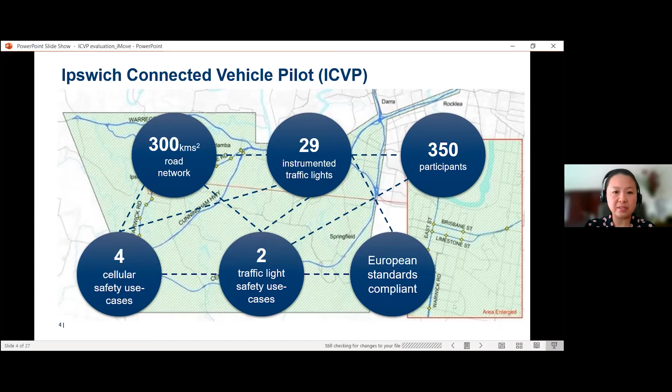And also we have a few traffic light corridors in Ipswich that are controlled by TMR. So we can implement all these use cases along, and also it's easier for us to maintain throughout the pilot study. So as you can see, there were 29 traffic lights that were instrumented with the CITS equipment. And from there, we have 2 traffic light use cases and 4 cellular type. I'll explain that a little bit more later.

And there are 6 safety use cases that we have developed in collaboration with our vendors. And on the left-hand side, we have 2 traffic signal based use cases. These 2, advanced red light warning and turning warning, are to provide participants warning in advance of any conflict, like if we believe that they are traveling too fast approaching a red light, or they are going to have conflict with the pedestrian crossing during the green.

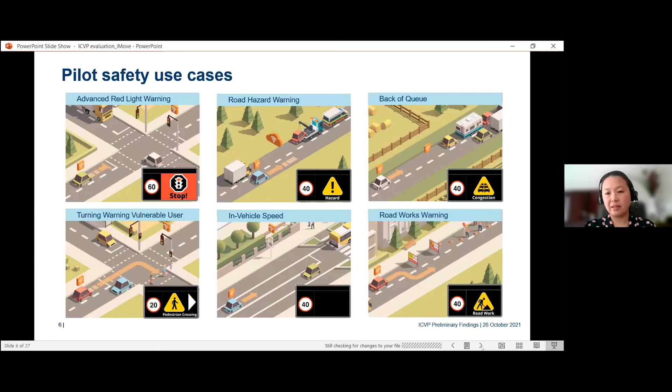So some overall pilot statistics here. So after the 12-month pilot with 350 people, everyone was required to travel about 3 hours per week minimum in the pilot area. So we end up with all these numbers here. So we have about 50,000 red light warnings issued. The yellow column means that they only have a medium, lower level of warning. The red column means it's escalated to a high level warning, which means that they really have to take action, not just a notification that there's a hazard.

So with the traffic signal based use cases, the communication between the roadside unit and the vehicle station is 10 Hertz. So every 1/10 of a second, they have been communicating to make sure that the safety critical information is transmitted to each other. So latency has been a very important aspect for us to look at.

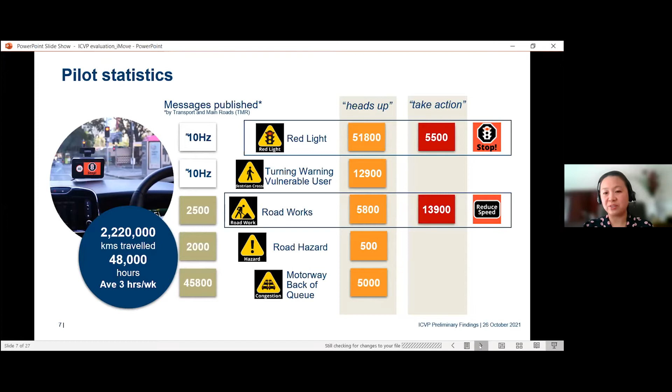And for the cellular type of warnings, we have a much smaller amount, basically because roadwork is not everywhere all the time, so it's just when they occur or when the participants were driving close to them. And yeah, you can see that there's a huge amount of data that we have to look at to provide some safety benefits.

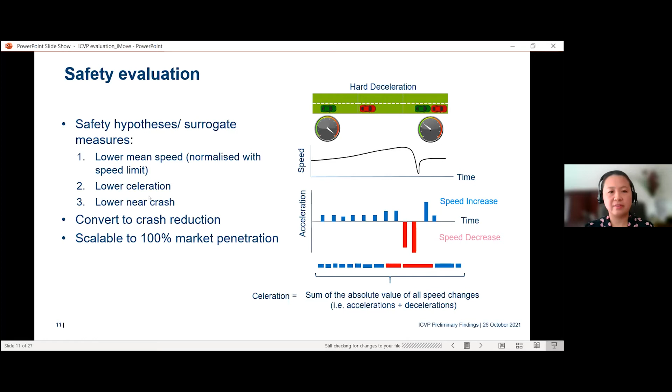Hello, everyone. So once we've done all this pre-processing and trimmed all the scenarios, how do we actually arrive at evaluating the safety of this system? We've done this by selecting 3 hypotheses, and these hypotheses are selected because they're good indicators of the safety of the vehicle. We can actually convert them to a crash reduction and then scale them to 100% market penetration. So the most typical one you would have heard of before is low mean normalized speed. Essentially what we do is we look at participant speed and we divide it by posted speed, i.e. the speed they're meant to be compliant with, and see if this changes when they receive warnings.

Perhaps a little bit more abstract is our second one, low celeration. And celeration, as you can see in that figure on the right, is essentially a summation of the absolute value of all these minute speed changes. So if we have someone that's slowly accelerating up behind a vehicle, we can see that all those blue bars are little bits of acceleration, and then they hard decelerate. So then we see that those red bars indicate deceleration. So essentially what we do is we convert all those accelerations and decelerations into one giant bar, one value, and that is a participant's celeration. And that's good because every participant has celeration, and evidence suggests that a person's celeration is related to their crash likelihood. So a low celeration means they're less likely to be involved in a crash, and vice versa.

And our third hypothesis, which is a little bit easier to understand, is lower near crash. So we expected that people who are receiving these warnings are going to have a lower near crash rate than if they weren't, because of several things, including their increased awareness of scenarios. So we investigate all of these hypotheses. Next slide, please, Mel.

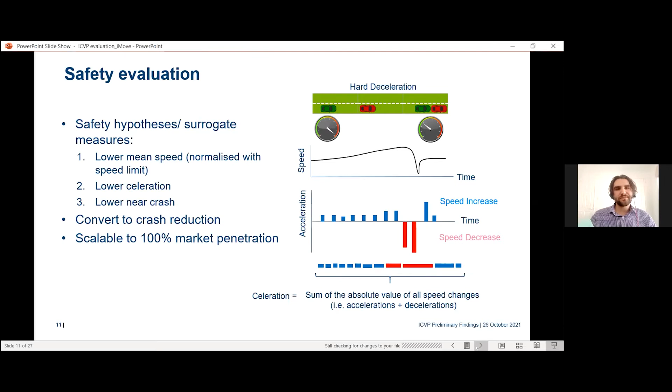Yep. So the way we've analyzed this is best explained by talking about the importance of these warnings. We need to analyze exactly what the impact of this warning is specifically. So there's no point looking at an entire trimmed scenario that Mel showed, because their celeration, their mean normalized speed, and all these other hypotheses are going to get diluted along the entire drive. So what we wanted to do is pinpoint exactly when they were getting these warnings and identify the change occurring because of that.

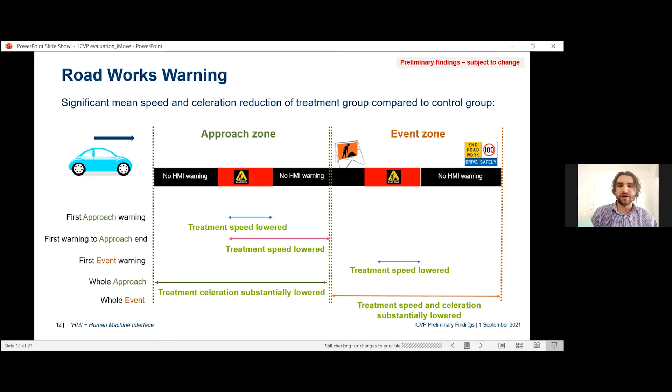So when we look at all these different windows in these different zones, what do we see? Well, we saw that the people who are receiving the warnings in the approach zone have a lower mean normalized speed, and their acceleration is actually substantially lower when we look at that entire approach zone. Even in the event, we see that they have a lower speed along the warning, and throughout that entire event zone, from that 40km/h zone until they leave it, they have a substantially lower speed and acceleration. So when we scale this, it equates to approximately 50% reduction in work-related crashes at the roadworks specifically.

Next slide, please, Mel.

So the back of queue doesn't have an event zone, and it's relating to the congestion. So we warn people that there's congestion ahead, and so it's only as they approach this congestion zone. And so when we look at the entire, so as soon as they enter that kind of approach, they enter a track where they encounter a congestion area, we see that the speed and acceleration is lower for people who are receiving these warnings.

But when we actually look at that warning onwards, so we know they've received the warning and they should be changing their behavior, we see that the speed doesn't have a significant difference between HMI, but speed variation or their acceleration from the warning onwards is lower. So this indicates that they might be receiving the warning and coasting ever so slightly slower, and they're not actually going to abruptly brake once they encounter this congestion.

Next slide, please, Mel.

And probably one of the more difficult use cases to evaluate is the road hazard warning analysis. And so these scenarios are very rare. I think we ended up only being able to analyze about 600, 800 scenarios. And it's very difficult because the sample size is so small and there's a lot of variation in these road hazard warnings. This road hazard warning covers anything from faulty traffic lights to flooding to a vehicle on the side of the road.

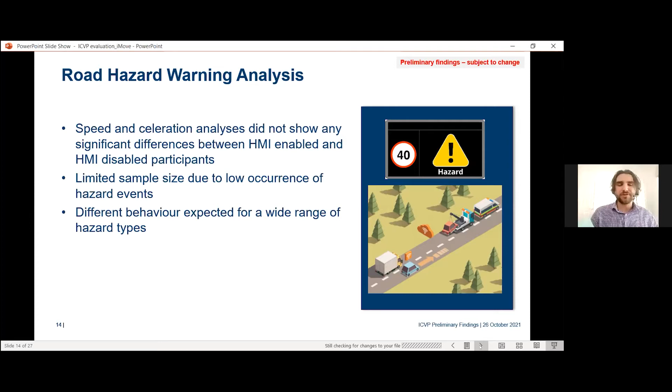Next one, please, Mel.

And one of the big problems with it is because of COVID. And because COVID was in place, a lot of the main intersections were equipped with automatic pedestrian crossing. So someone didn't have to activate the pedestrian crossing for it to go. And the system is not able to recognize that this was an automated pedestrian crossing. So for 6 of the major intersections, we had to remove all the data when these pedestrian crossings were activated.

And from memory, it was from the beginning of the fault until about the 18th of February, where we had to remove this data. Also, participants received some false positive warnings because they had a straight movement. This is specifically for turning movement. So when people are going straight and there's a pedestrian crossing activated that they're meant to turn through, they also received these warnings.

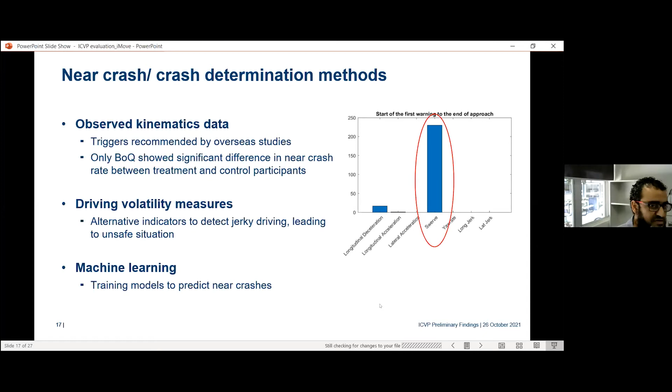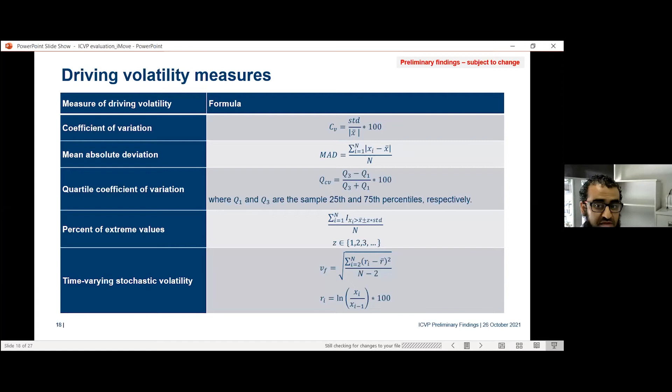And so for volatility measures, we used 5 different volatility measures, which are used to measure the deviation from normal driving. And we used also the historical crashes at the intersection location and identified motorway links to model the frequency of crashes as a function of volatility using the control participants.

And once we did this model, we can actually estimate the expected crashes for the baseline and for the intervention and compare the expected number of crashes. And then we can estimate if we have a significant reduction in crashes because of HMI or not.

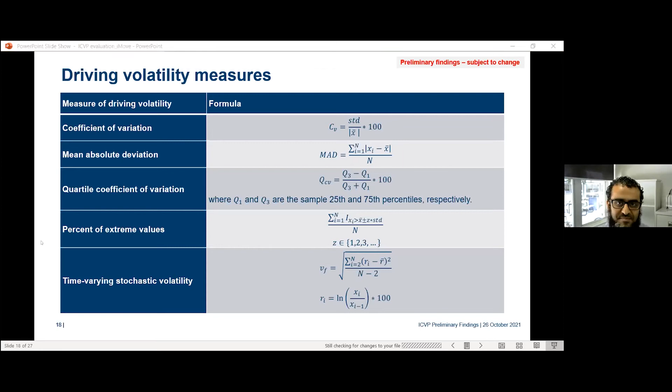So Jack? Yep. I'm just conscious of time, so I'll very quickly go through this so I don't steal any of Mike's glory. So essentially what we do is we look at the 100-car data in the American data set.

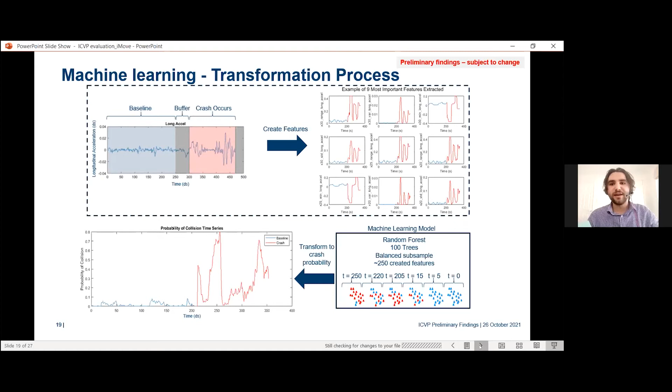So if we want to talk about this a little bit further, I'm happy to take any questions, but I'll give it over to Mike so that he can actually get a chance to talk. Thanks, Jack. So yeah, conscious of time, I'm going to speed through this as fast as I can.

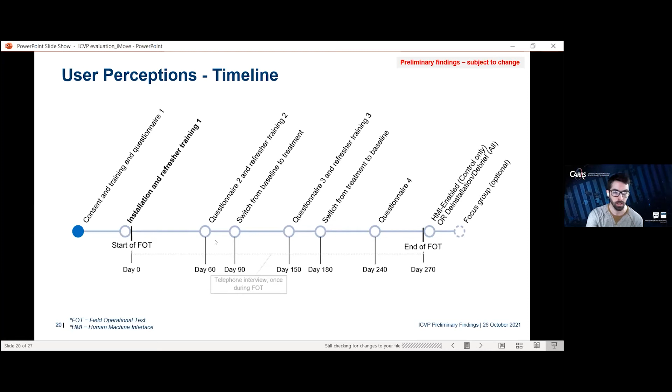Basically, this is the timeline overview of what each participant saw in their 9 months. There were 4 questionnaires. The first questionnaire was completed before they had the equipment installed, and then they saw 3 remaining questionnaires spread out over the 9 months. And then during that time, they could also do interviews and focus groups afterwards when they were done participating.

Okay, so this is just a brief look at our participants. We had 350 to start. The mean age was 46. Our oldest participant was 78 and the youngest was 20. Split down the middle in terms of gender, and most of our participants had open licenses.

We were restricted by the technology being installed in people's vehicles and being an extra display, so we weren't able to recruit new or learner drivers, but we did have 3 P2s in there. The final sample that we had by questionnaire 4 was 326, and that was just the result of normal participants wanting to withdraw and some missing data.

Okay. So these are the measures that we looked at. Acceptance is a pretty standard one. We used the unified model for driver acceptance. We looked at self-reported safety, differences in attention and perception. This is self-reported attention and perception, experiences related to the warnings and the HMI, experiences related to the use cases and general experiences in the pilot.

And then in the most recent round of interviews and the focus groups, we also tried to get at some idea of what they thought future technology should do and what it should look like. Okay. So participants made the ratings on most questions using sliding scales, which you can see here at the top. This is the overview of acceptance in and of itself. So on the left side, they were rating bad versus good, useful versus useless, etc. And then on the right, they were agreeing or disagreeing to these statements.

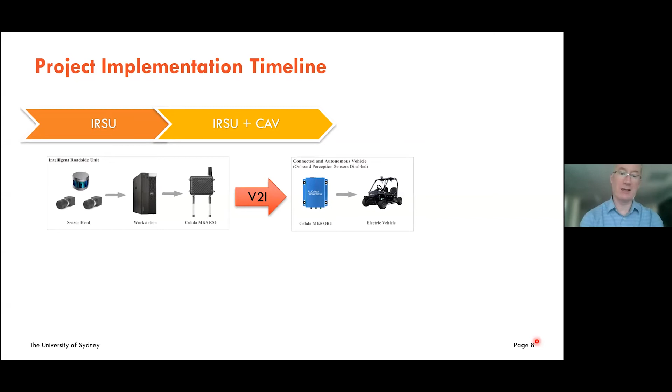Then we bring the second vehicle into play. So fast forward now, yep. So having multiple vehicles there where vehicles are in receipt of perception information, both from infrastructure and from other vehicles. And it's that other vehicles one, which is really the gold standard because of the aforementioned issues.

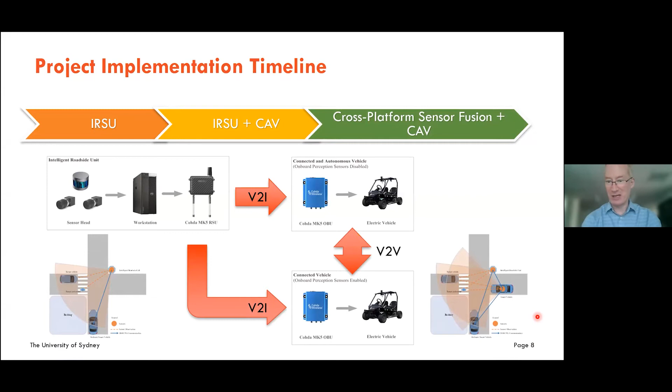So that was a bit of a machine gun presentation, but I'll hand over to Mao now to present the details. Thanks, Mao. Okay, thanks, Ed, and thanks, Paul, for the introduction of the project. So it's my great pleasure representing the joint research team from ACFR and from Cohda Wireless to present a summary of what we have achieved during this project over the last 3 years. So this will be the structure of the remainder of the talk.

So as mentioned earlier, like Paul mentioned, intelligent infrastructure is a really significant component in cooperative perception. But let's look at what makes the intelligent infrastructure required in CP different from those in the existing projects. So here I list a few examples of Australian ITS projects that involve intelligent infrastructure. So there are smart motorways in New South Wales, and in Queensland, WestConnex and Transmax. And so both of them have an incident management system in place, where cameras are deployed along the motorway to monitor traffic and detect car incidents and have the information forwarded back to the control center.

There are also 2 V2X trials. So one is a V2X freight priority trial in New South Wales, where freight trucks are given priority when they are passing traffic lights so as to reduce traffic congestion. The other one, Ipswich connected vehicle pilot, is exactly the project the previous session was talking about. So we've already learned a lot of information from there. So it was a wonderful project. So both of the V2X trials focus on the use of existing standard V2X messages. However, none of the existing messages is meant for the CP use case.

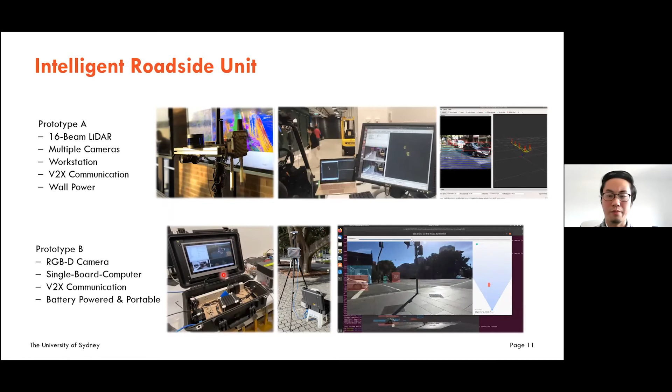So as for the vehicle platform, we use these two electric vehicles that have been retrofitted with a suite of perception sensors, including a multi-beam LiDAR and 6 cameras that can cover 360 degrees around the vehicle. So the vehicle can use its onboard perception sensors to track the surrounding objects and can achieve full autonomy in a campus environment. So what you are looking at right now in this video is the autonomous transit on demand using the vehicle. So now with the add-on of the Cohda Wireless MK5 OBU, this autonomous vehicle platform is turned into a CAV, the connected and autonomous vehicle.

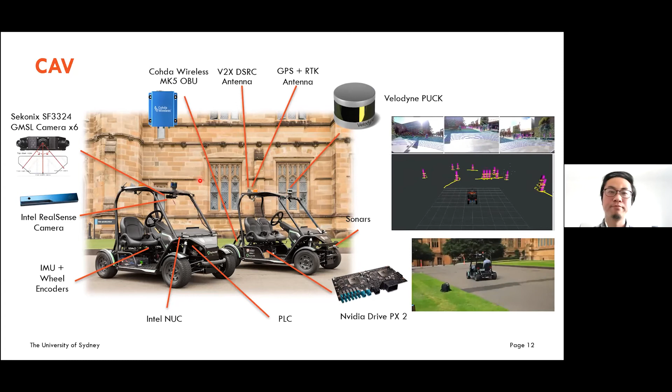So I would like to briefly talk about 2 important techniques used in CP within the CAV. So what you're looking at right now is a common perception pipeline that can process sensory data from its local sensors. But now through V2X communication, the vehicle can also receive remote perception information from other ITS stations like other connected vehicles or intelligent infrastructure. But as Paul mentioned earlier, the information contained in the CPMs is registered in the sender's coordinate system. So it has to be transformed into the receiver CAV's local coordinate system before it can be fused into its current perception pipeline. So this coordinate transformation is also referred to as time and position alignment in the literature.

So we stress that the coordinate transformation process also needs to consider the perception uncertainty you are looking at right now, and the sender's localization uncertainty, and finally the receiver's localization uncertainty. So in the end, the final uncertainty of the information after transformation is a combined result of the 3 uncertainties. So the other important thing to note is that you won't know how much the perception data in the received CPMs is correlated with any prior information. So this brings the risk of double counting of information, which leads to over-optimistic estimation results. So to solve this, we propose to use covariance intersection in the data fusion, which can safely fuse the remote perception information with unknown correlations.

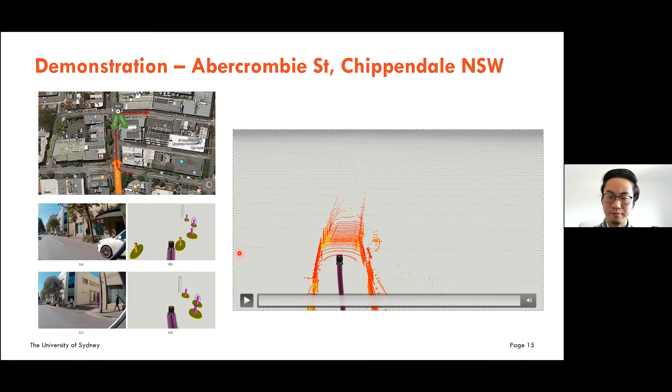So this shows that the vehicle can see around the corners using CP so that it can consider this safety-crucial information in its decision-making process. So the second one demonstrated that CP helps automated vehicles avoid collision with road users. This demo was conducted in a simulator in CARLA. One of the benefits of using a simulator is that it's a safe playground for us where we can have our algorithm fully tested before we test it in real-world experiments.

So in this demo, what you are watching right now is this CAV, this vehicle without any onboard perception sensors, can safely interact with jaywalkers only using the information from the roadside unit. The roadside unit is deployed somewhere down the road. It's visualized as a car next to the road. So to avoid this jaywalker, the vehicle planned a new path, switched to the other lane, and then switched back to the original lane after the avoiding maneuver.

So now this is another scenario where two jaywalkers are blocking the entire road. So the CAV had to decelerate to stop, wait there until there is enough space for it to navigate around them. So in both scenarios, the CAV made all these decisions by itself using only the information from the roadside unit.

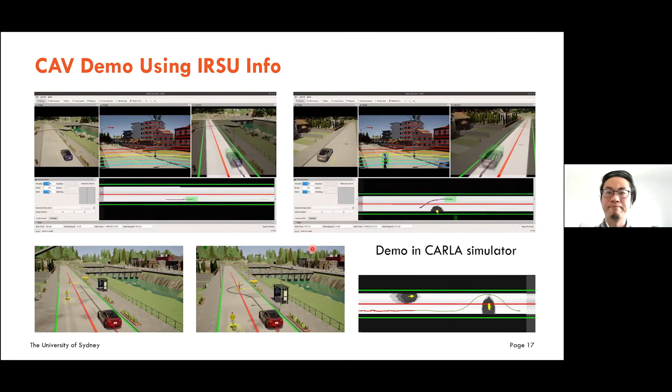So next one demonstrated that CP helps automated vehicles know what's to come. This was a demo conducted in a lab environment. The CAV was driving by itself towards a designated pedestrian crossing, and the roadside unit was deployed here to monitor the crossing. There was a pedestrian in the demo. It was actually myself running towards the crossing. And the CAV learned from the roadside unit that there's someone approaching the crossing, so it stopped in front of the crossing for me to give way until the crossing was clear.

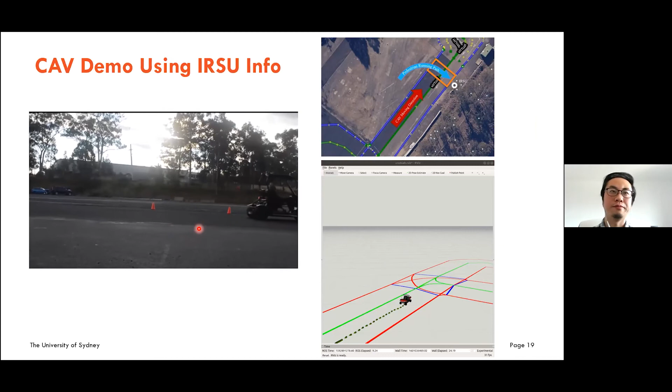So this is the same thing, but from the roadside unit point of view, and this is the same thing from the vehicle's point of view. Based on the current position and the kinematics of the pedestrian received from the roadside unit, the vehicle predicted the pedestrian's future position and reacted accordingly.

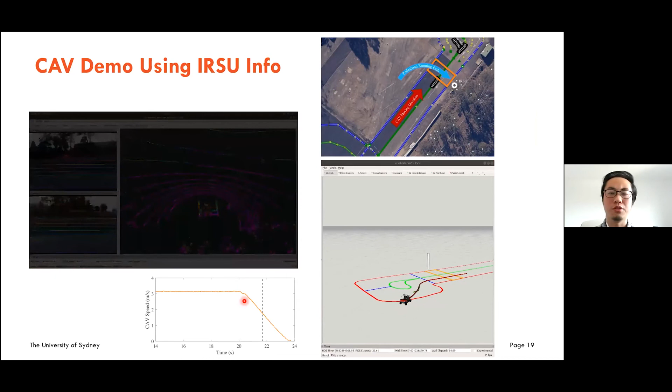So next one demonstrated that CP helps automated vehicles see road users more clearly. This is a similar demo to the previous one, but with a more complicated setup. Another connected vehicle was here to monitor the same crossing area. So this CAV, this time, is receiving CP information from both the roadside unit and the connected vehicle through V2I and V2V communication.

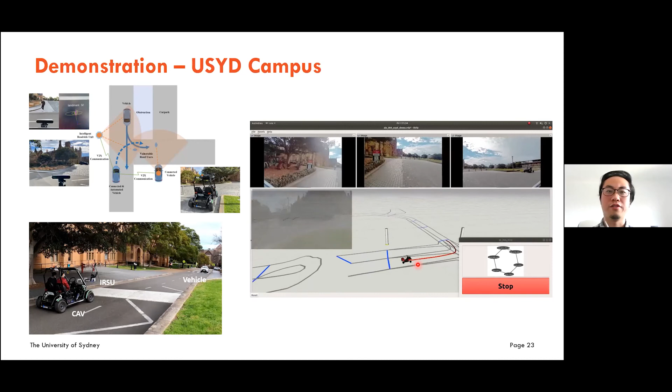So now the CAV is approaching and stopped in front of the T-junction, waiting for this white RAV4 to turn left at this T-junction. And not long after, actually, there was a public pedestrian who entered the T-junction area. So the CAV had to wait there for an extended period of time. Finally, when the CP system advised that the T-junction was fully clear of road users, the CAV started turning right safely. So I think to this point, we are in a better position to answer those three questions.

For example, how can CP make our road safer? We have demonstrated these 5 safety-related aspects of how CP can help CAVs and essentially make our road safer. So how can CP shape the development of AV? I think one of the challenges for an autonomous vehicle to hit Australian roads is high cost, and its onboard perception sensors account for a significant proportion of the cost. But with CP now, the perception is achieved not by an individual vehicle, but collectively by vehicle fleet and the infrastructure in the local region.

So this can substantially help an autonomous vehicle reduce the reliance on the local perception sensors, and thus lower the per vehicle cost. So lastly, for this question, we already showed in the demonstration that using the cross-platform data fusion, we can combine the perception information from multiple sources and produce more accurate and reliable estimates to the CAV. So now let's look at the big picture. This is the final slide.

So over the last 3 years, we've developed a roadside unit and the CAV platforms and a set of algorithms that can enable CP. Also, we have developed and tested an autonomous driving stack, which has proven to be working very well in the campus environment. So we've also accumulated expertise and experience in different research areas. So more importantly, we always focus on testing algorithms using real platforms in real environments.

So for the future work, we would like to push our current CP work to the next level. So we are looking at opportunities of deployment of our CP technology and on-road trials in Cudal, followed by Orange, New South Wales. Also, as I mentioned earlier, we can explore augmenting the CPM with additional information, for example, future path, intention, learned features, etc., which can trigger more future CITS applications. So we call it a CPM+.

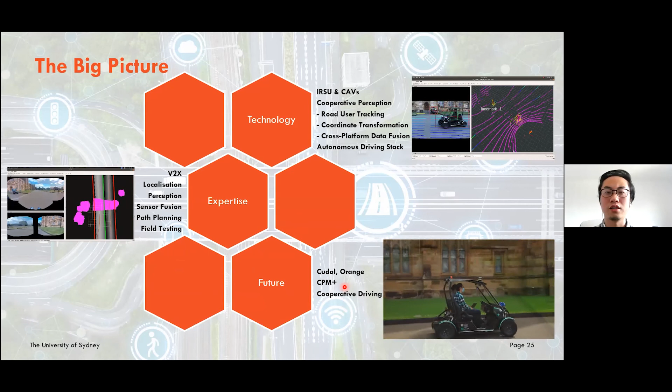So lastly, we've done some preliminary work in cooperative driving. So what you can see from this video actually is a cooperative lane crossing using V2X communication. So I will leave this page running.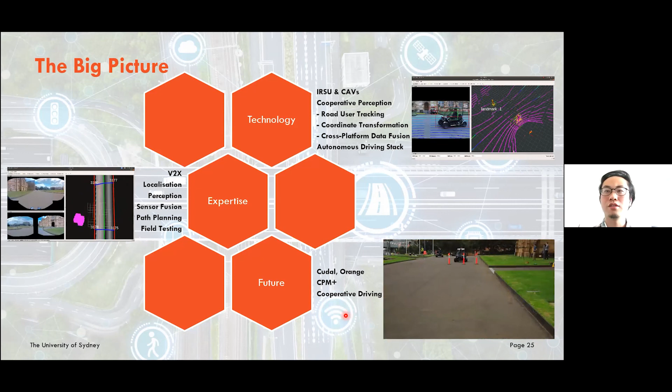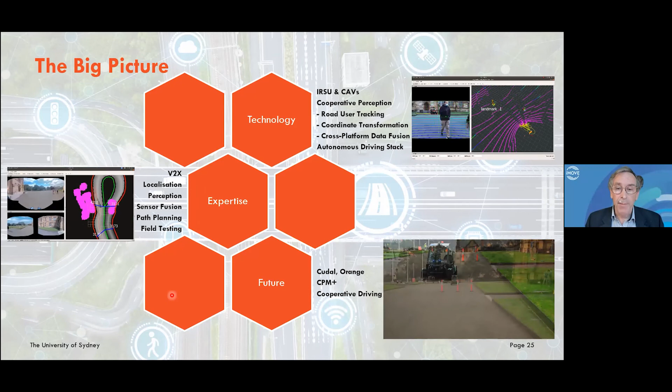Thank you, Mao, and thank you also to Eduardo and Paul for your contributions to this really quite profound step forward in terms of capability for safely navigating intersections and the roadway around hazards. So we now get to ask some questions and get some answers. To the audience, I would invite you to focus first on questions around cooperative perception for Eduardo and Paul and Mao, and then we'll go to some of the other questions that have already been raised around the Ipswich connected vehicle trial. But I'm going to start first with a question following on from Mao's last comments on the things to do next, the further developments that should be made.

To Paul Alexander, from Cohda Wireless's point of view, or from the point of view of actually building a device and deploying the technology across the community, what are the next steps that Cohda Wireless would like to see happen to make this technology real or accessible to the community at large?

It's a good question, Ian. So really from our point of view, I think it's standards first. So we have to get the standards sorted out. They are not yet done. And actually, we didn't mention that some outputs from this work actually went into ETSI. So we actually did provide some feedback. So yeah, we have to have the standards done. But Europe seems to be ahead of the US so far on this, let alone the additional features that Mao was talking about. So CPM plus, as he called it.